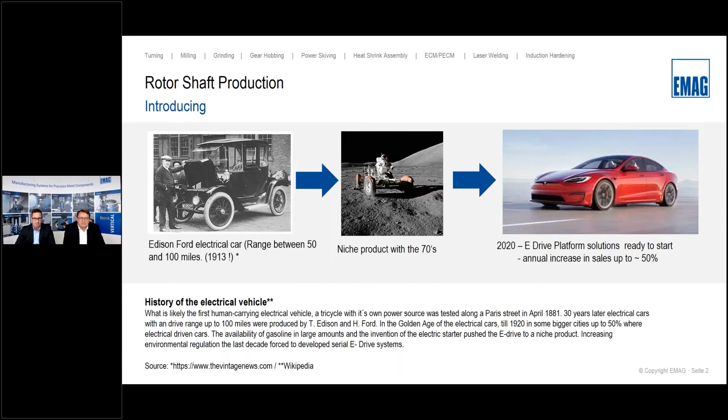Moving into the 21st century, with increasing environmental regulation over the last decade, this has forced major automotive OEMs to develop serial e-drive production systems. Now we'll move on to the rotor shaft processing, and then obviously return to Jochen for the assembly portion of the presentation. Within this slide, we show the typical powertrain components inclusive of an ICE. You have your engine, your valve train, transmission, and your exhaust system.

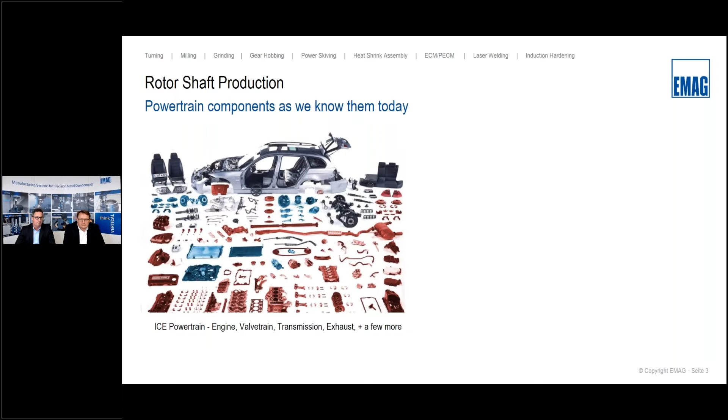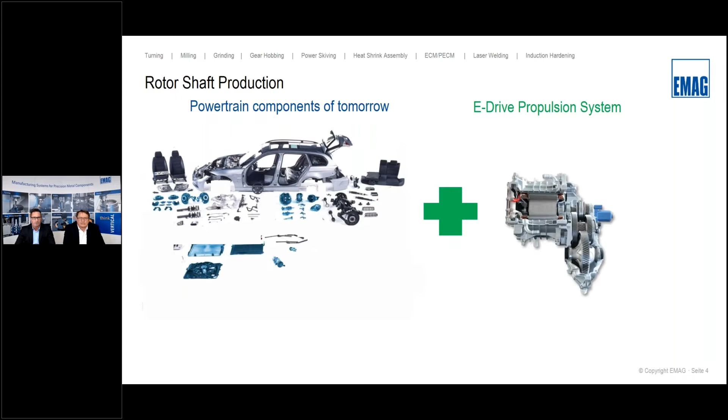This is what the powertrain components of tomorrow look like with an electrical vehicle. As we push towards EV, we move towards propulsion systems. And today we will focus on the machining and assembling of the rotor, a key component to the e-drive system. What you'll notice here, all of the labeled components within this slide are considered to be strategic components within the EMAG group. Thus, EMAG focuses and has focused on developing multi-technology solutions that can be connected for both the machining and assembly of these components.

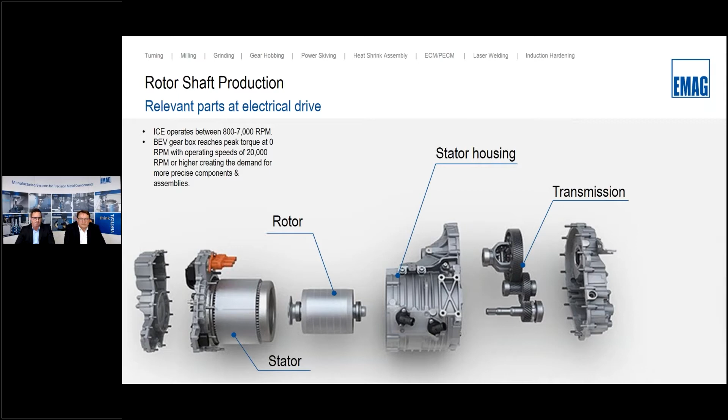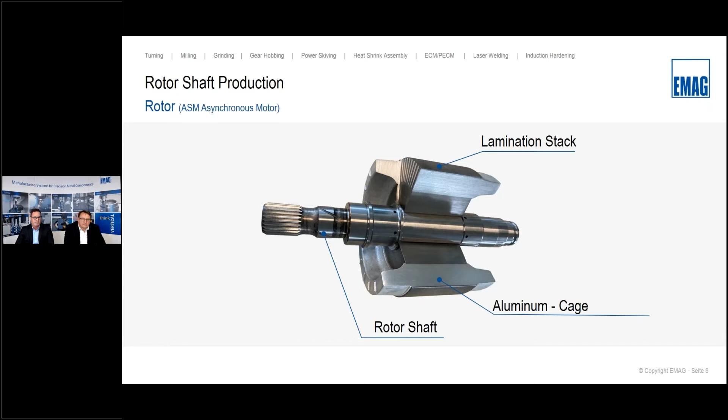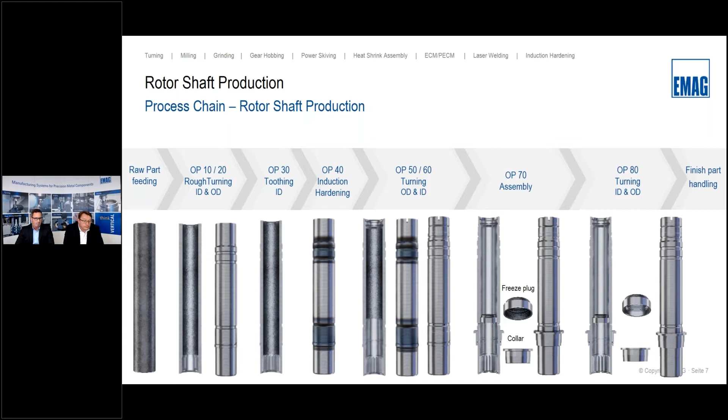What you'll see here is operation 5, operation 10, 20, and then operation 30. In the lower left window, we feature our VTC 200 4-axis vertical turning center fed by a raw parts conveyor and automated by EMAG's own track motion system, which is a 4-axis system similar to a robot on a rail. This provides part handling to the turning machines along with subsequent downstream processes such as the blow-off device and the post-process measuring device.

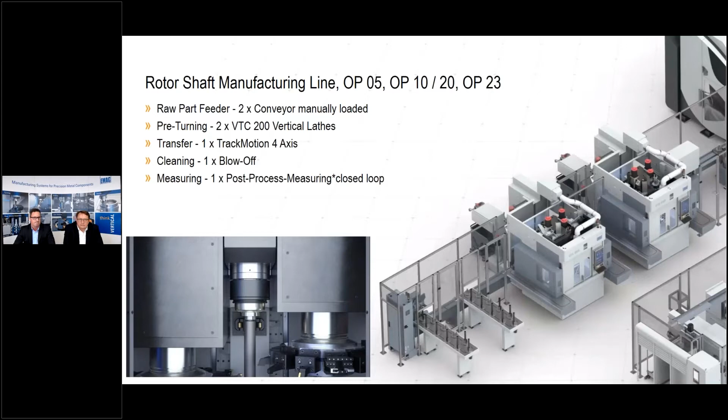Moving on to Op 26 through Op 40, you'll see again, for Op 26, we incorporated a third-party technology from one of our systems partners for the toothing or ID spline. And then you'll see the part is then induction hardened with our own eldec Mind L-1000 rotary table induction hardening system. Again, this cell comes with 2 robots and a blow-off station for the subsequent downstream processing.

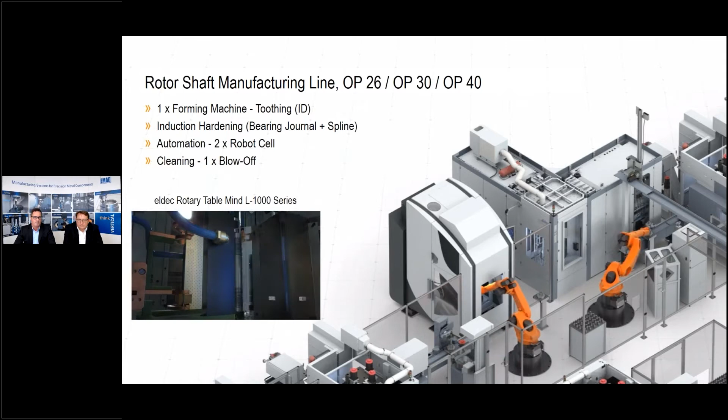Moving on to Op 50 and Op 60. For the production requirements for these operations, you'll see that we doubled up on both Op 50 and Op 60. Operation 50 is utilizing a center drive work holding solution, allowing simultaneous ID turning of opposing sides of the shaft, while Op 60 completes the semi-finished turning of the OD. Again, supported by 2 track motion systems, a gantry, and a blow-off station for subsequent processes.

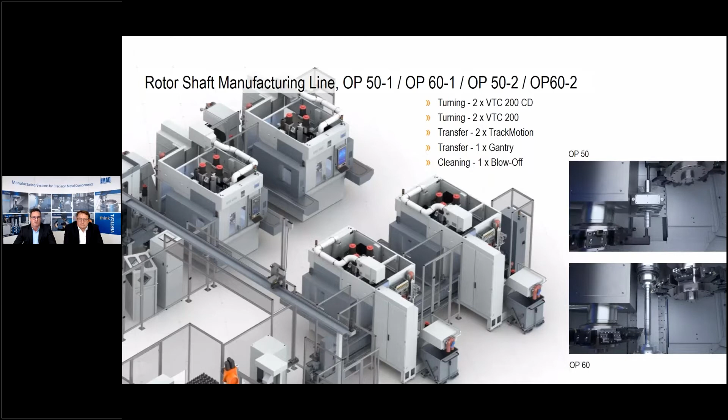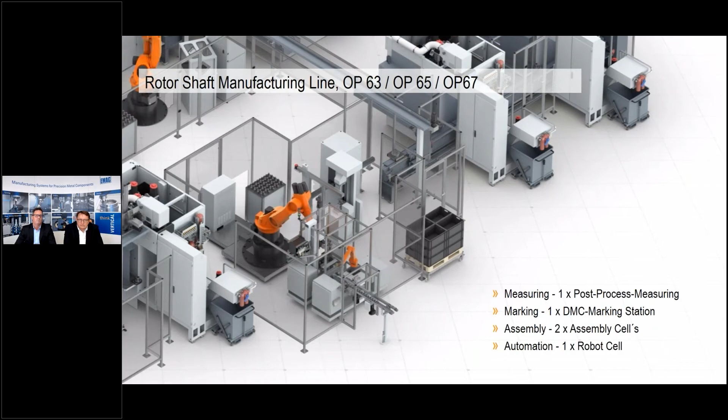Okay. Lastly, this final video shows the entire cell sequence for part processing, using a simulation software that helps to discover potential bottlenecks in throughput early on in the design phase when we're discussing these solutions and these systems with major OEMs as well as tier 1 suppliers. What you'll see here is technology connected by the EMAG group.

And to recap, you'll see that this line includes 7 vertical turning machines, 3 track motion systems, 3 robots, 4 post-process gauges, along with multiple gantry systems for blow-off stations and marking stations, again, for traceability of the components moving through the cell.

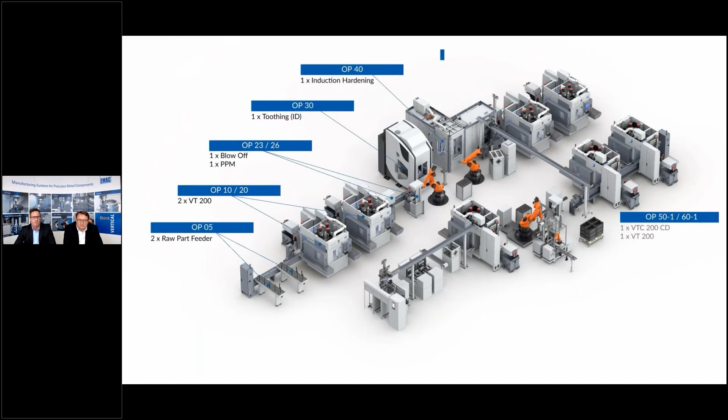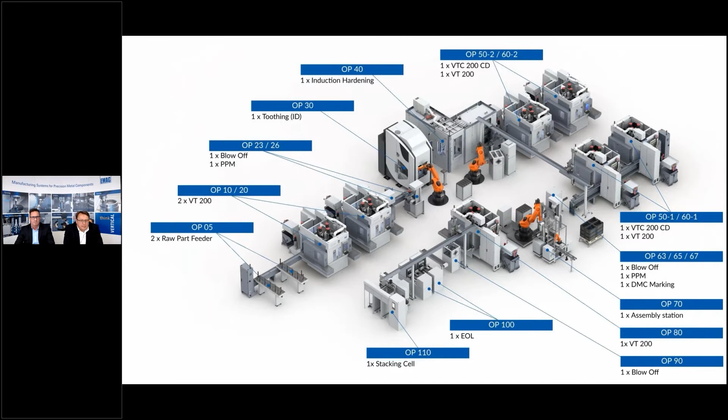Now I'd like to hand this over to Jochen, and he will speak in regards to the assembly side of the rotor. Thank you, Mike. Thanks for enlightening us on the manufacturing process of the rotor shaft. Now we want to direct your attention to the assembly process EMAG Group offers to the rotor lamination stack, the stator lamination stack, and finally the thermal fit of shaft to rotor stack as sub-assembly of the E-module.

The slide here shows the individual processes from sheet metal stampings all the way to an assembled rotor stack, which includes the measuring of the height, the parallelism, as well as the marking process, before it is packaged for the next process in the cell. Please.

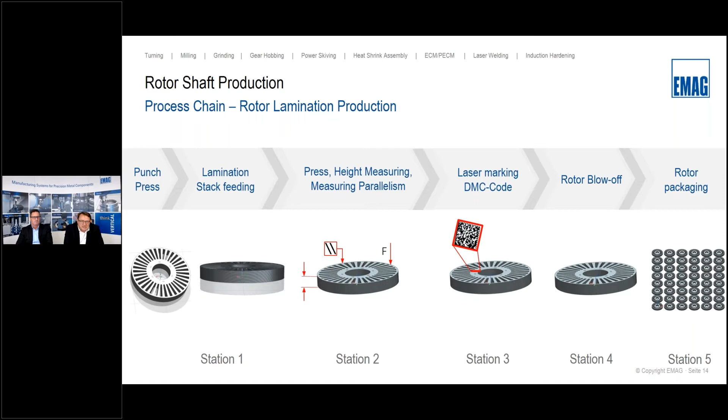EMAG is using index rotary dial machines as their assembly systems. Here, in particular, you see 2 of these machines identically put together in parallel in order to machine or assemble a stack in 4.3 seconds stack time.

Each machine consists of a rotary table with 5 positions from where the sheet metal parts are introduced, and then it indexes from one station to the next, all the way up to station number 5, where the robot then picks it up and prepares it for the next downstream operation.

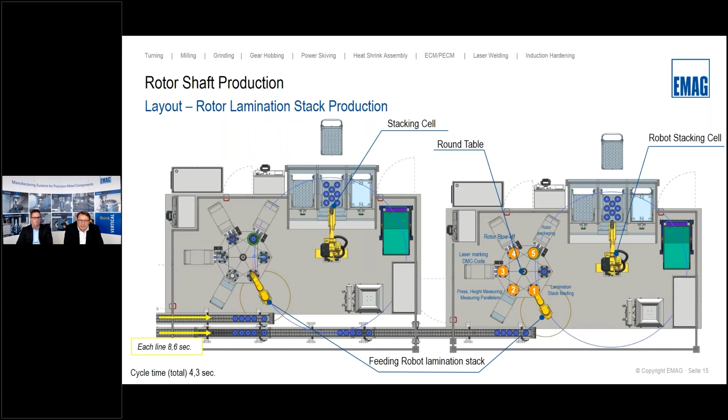This one here shows we now have two parts. We have the assembled rotor stack lamination, and we have the shaft, and Mike explained to us how we got to this stage. So in order to make this an assembly, it requires that the rotor stack go through a process called high pressure aluminum die cast that takes the stack and cages it in.

It is then reintroduced into the assembly cell, where it is being fit under thermal conditions using our induction technology with the rotor. And then one of the next steps is the OD turning of the subassembly before it is then being marked, gauged, balanced, and packed.

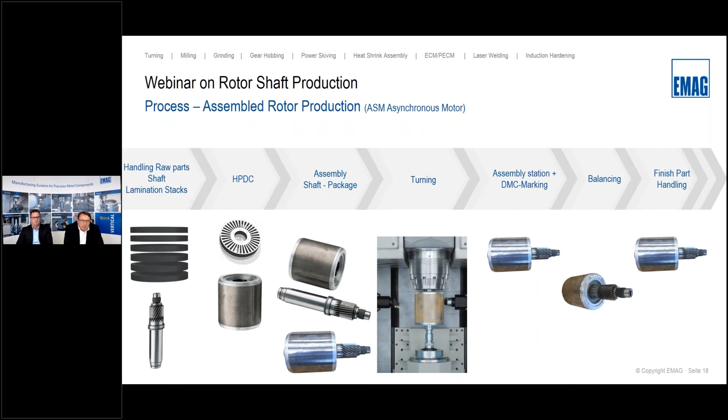This shows you an overview of the cell, starting with the supply of lamination stack, which will be introduced to an area where we, or a partner of ours, perform the high pressure die cast operation. The part then is reintroduced to our cell, where it is being assembled with the rotor by using our induction, followed by our 2 VTC 200 4-axis machines, also here connected in parallel to maintain takt time of the cell,

where the OD is being machined, followed by a post-process gauge that assures the highest and tightest quality over the shift of a day. Together with our sister tool strategy, we can guarantee the most uptime in this process. We are then following with a dynamic balancing process, gauging, cleaning, and packaging.

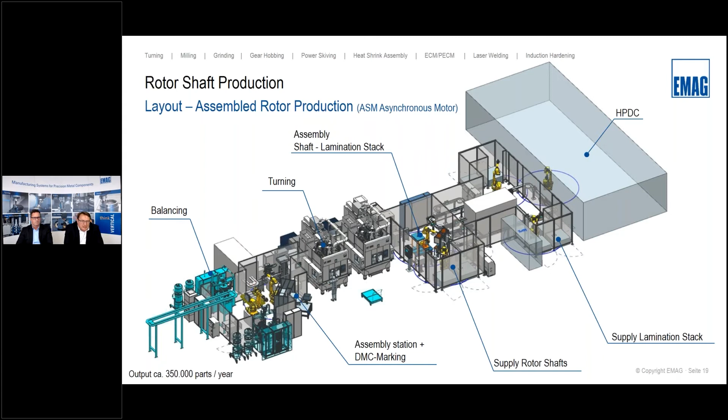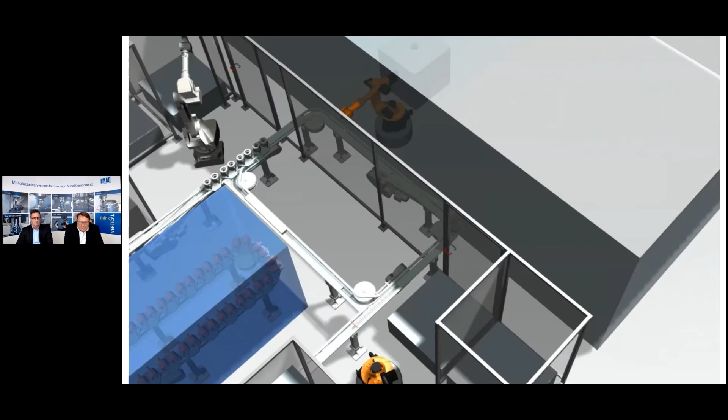Now, these next few slides will illustrate some videos of the cell to better show you the process in detail, where here the lamination stack is being put onto a conveying system, from where it is then introduced into the aluminum die cast area, before it is then, as a finished part, reintroduced to our cell for the assembly with a shaft.

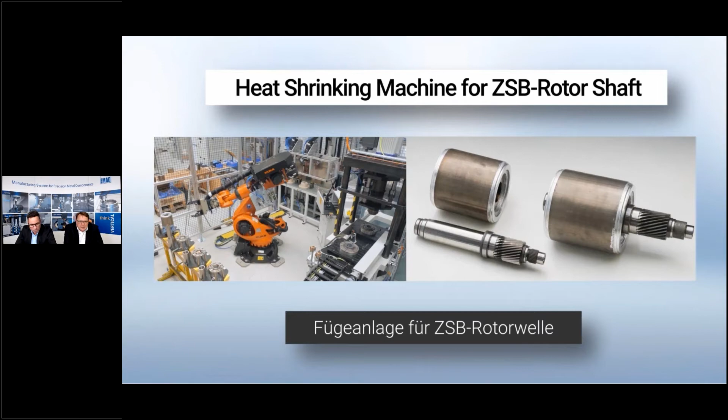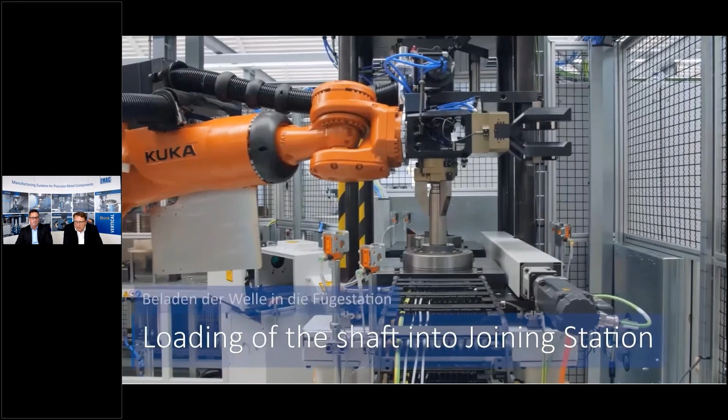This slide now is showing the OD turning of the subassembly of the electric motor, which consists of the rotor lamination stack and the shaft. As a matter of fact, we actually are here still on the assembly side, where we now fit the rotor shaft into the lamination stack.

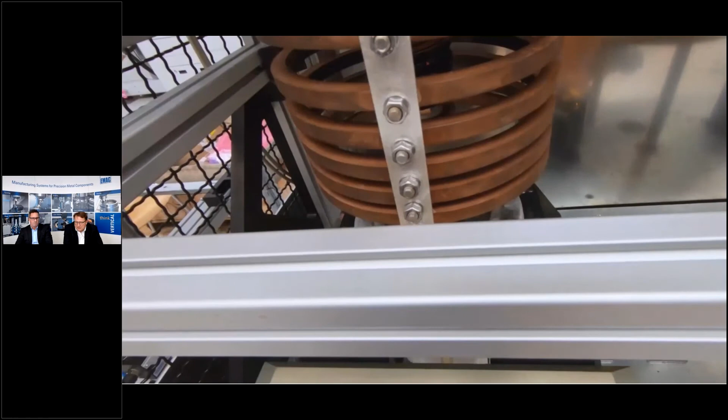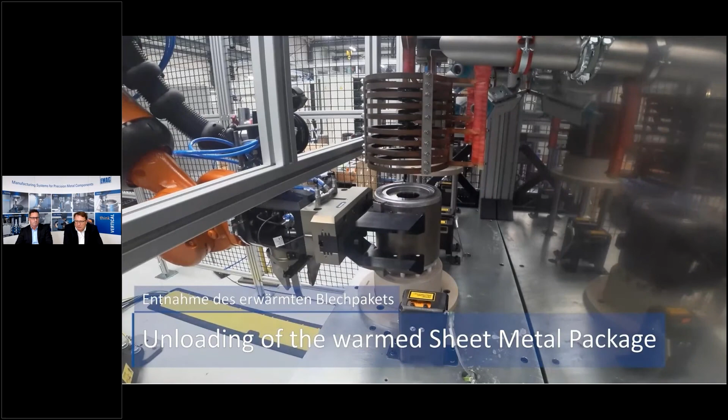Twin station. The twin station, yes, Mike, that's correct. It's a twin station so that we minimize load and unload time as part of the takt time of this machine cell. Power supplies, inductors, and the entire cell come from the eldec division within the EMAG group.

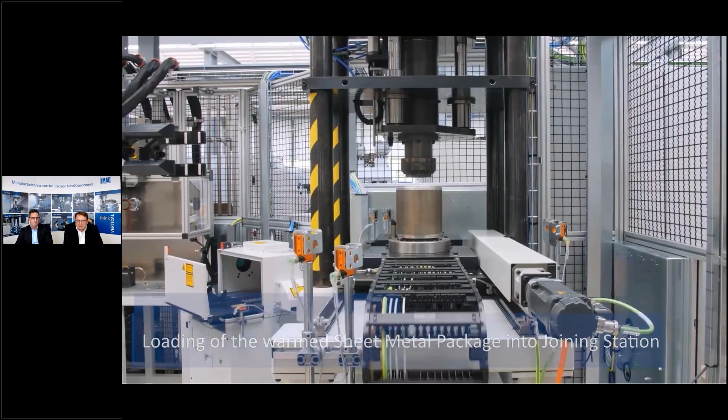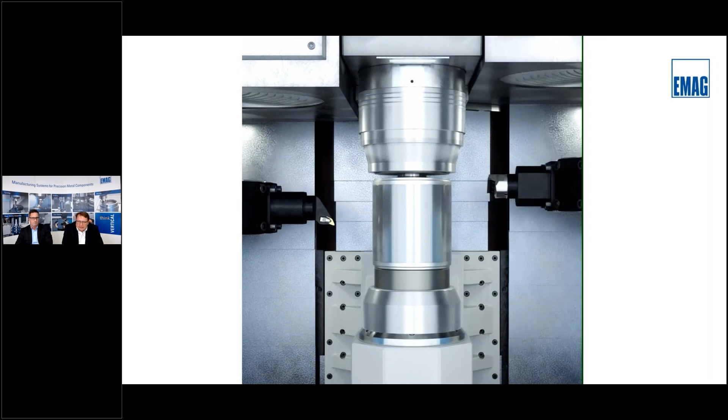Now we have our VTC 200 4-axis machine, where we pinch turn the OD, followed by the finish cut on the OD, which can be performed either dry or wet.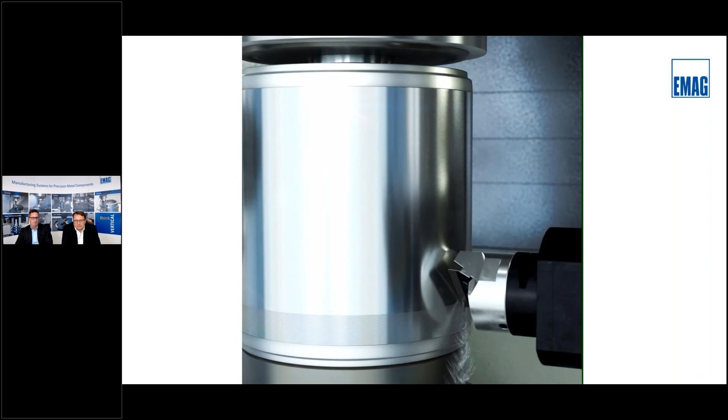The next video shows, it's not playing here. All right. Yeah. Okay, now it's starting to move.

And what you can see here is that the moving of the parts with those robots is not just for this presentation to show you some movements on slides, but it's also being used to optimize the cell configuration to identify bottlenecks way upfront in the design stage, so that corrective actions can be taken before we actually have to produce the cell on the floor.

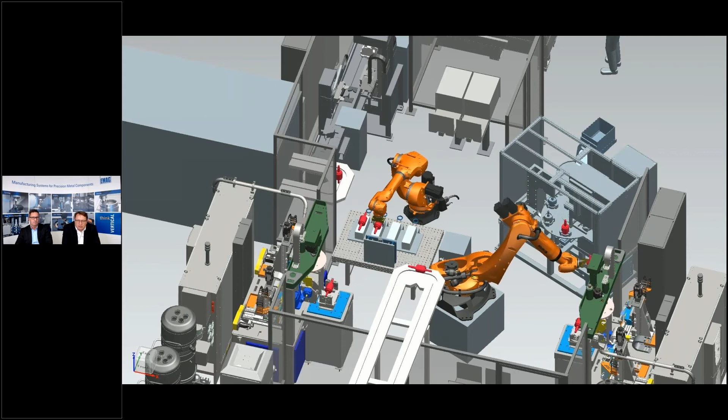Some of our rotor shafts come as a two-part design, which is no problem for the EMAG group, as we have our division LaserTec that has a machine, our ELC 160 H, that laser welds produced rotor shafts, shown better in the next video, in two stations, where on one side we load and unload, while in the center we are already welding the other part, and then it moves over, please.

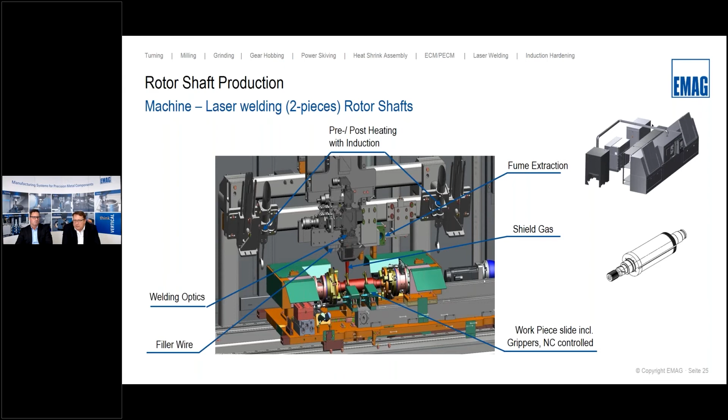As shafts in the rotor assembly business sometimes also have to be hardened, as Mike mentioned before, on the rotor shaft itself we are using our induction MIND-L 1000 machine with an index rotary table in order to accomplish these tasks.

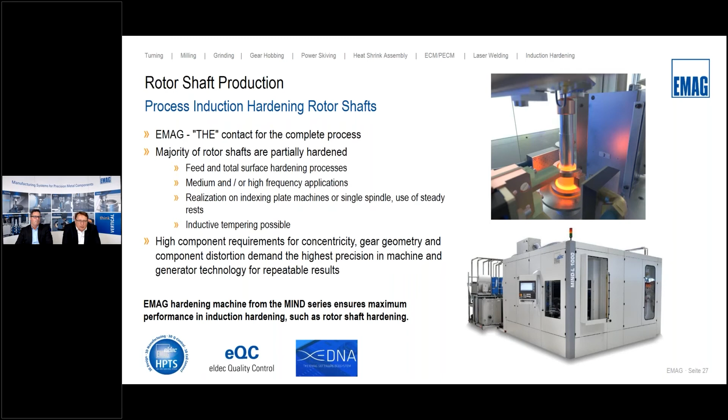So your benefit in deciding for the EMAG product line is obviously that we have the experts you are looking for on staff, and we are one face to the customer, as we call it, being one EMAG, to present to you the best possible and most cost-effective solutions for your needs to produce not only rotor shafts or assemblies, but all kinds of other parts that you can turn, weld, harden, grind, or hob and shape if it comes to gears.

As you might know, EMAG is globally operating. Today, as I mentioned, we greeted you from our facility in Farmington Hills, Michigan. And if you are located in Asia or in Europe, we certainly have several locations that will be able to take care of your needs.